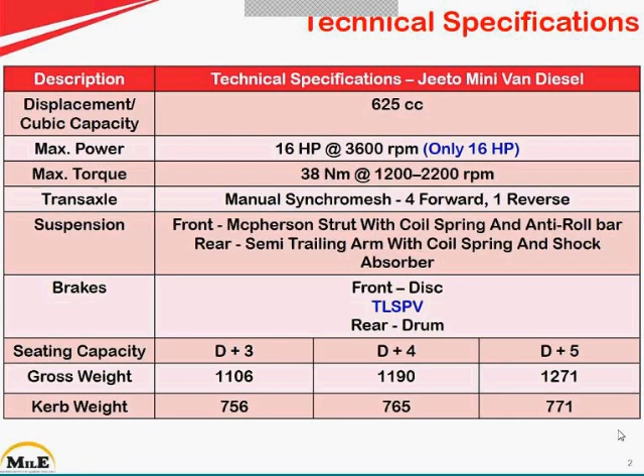Next, let's discuss how the vehicle looks from the inside. Take a quick look, the pictures basically speak for themselves. The instrument panel is nice and wide, and it's basically going to serve the requirements for a vehicle in this particular class.

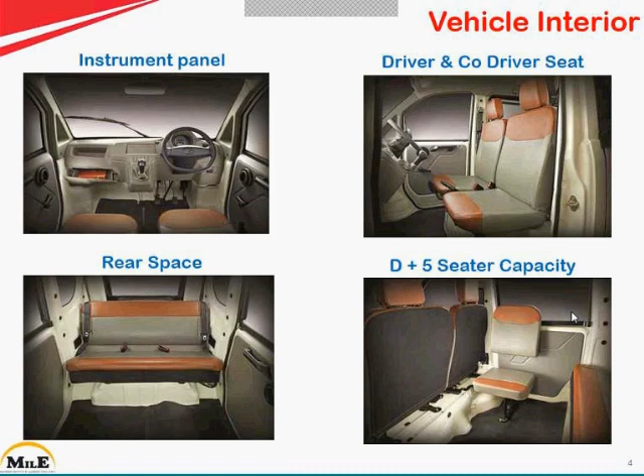So we're discussing seating positions. Before you take 5 people along with you on a test drive, this picture makes it very clear how exactly people would be sitting. When you talk about D+5, that's what basically makes sense, this is how the 5th person is going to sit. The sufficient leg room we have makes the seating posture convenient for this person.

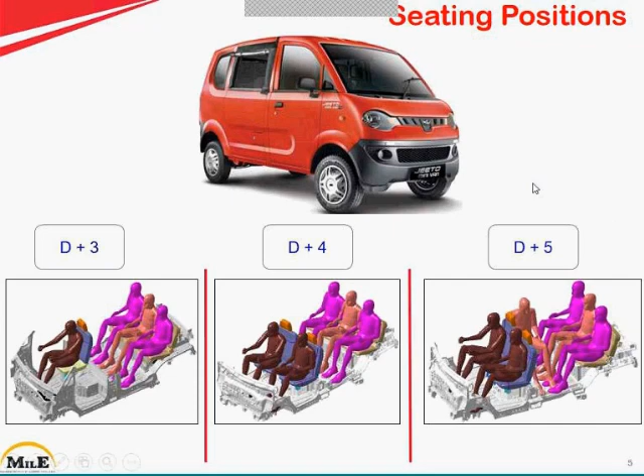So yeah, D+3, D+4, D+5. Let's move ahead, we have more numbers to basically munch and chew.

These are numbers like the front track, rear track, wheelbase, the height of the vehicle, the length of the vehicle, and the width of the vehicle. The front track is 1305 mm, the rear track is 1290 mm, and the wheelbase is 2250 mm. So it's pretty stable when it comes to driving.

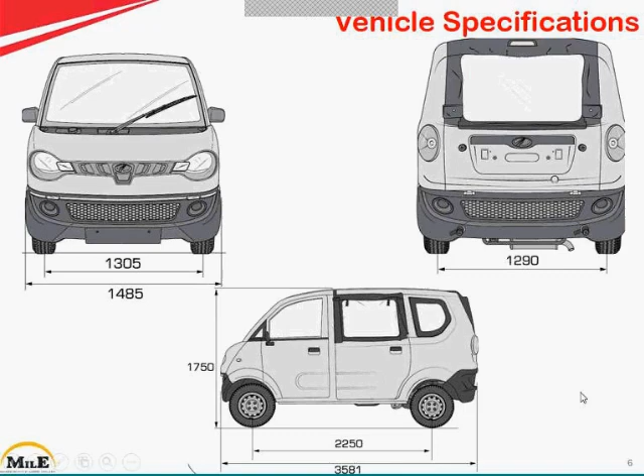Let's move ahead and talk about the engine specifications. First question, which kind of engine does it have? It's got a single cylinder diesel engine, called the mDura single cylinder diesel engine. Displacement is 625 cc's, we spoke about this before. It's got 16 horsepower and 38 Newton meters of torque, and it complies to BS4 emission norms.

These are the quick points you can make a note of, or simply remember if you were to talk about it to somebody.

Then we're talking about the Jeeto Minivan. There were a lot of videos we've been circulating since the previous year, the special tool based videos. In that series there was also a video about the stretch belt removal and installation. There's a tool available for the removal and installation of the stretch belt.

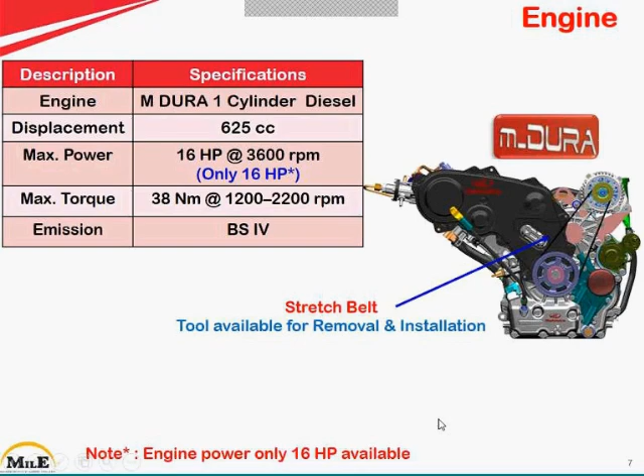Engine power is 16 horsepower, only a 16 horsepower variant option is available. Then after that we're talking about specifications for the Transaxle.

We just spoke about what the engine has, basically the specification of the engine. Then if we're talking about the Transaxle, we spoke about it too, it's got 4 forward gears and 1 reverse gear.

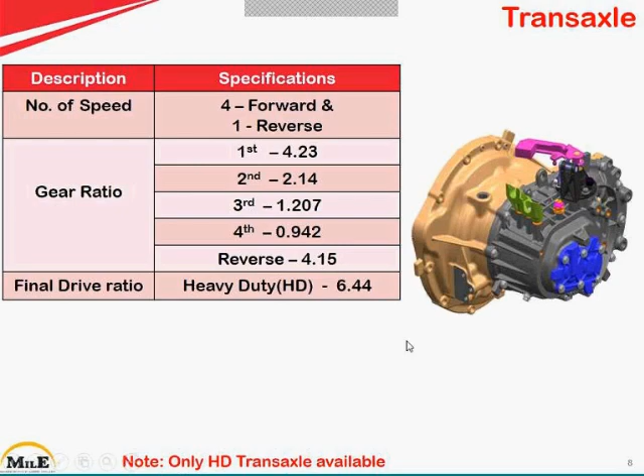Whichever gear you shift into, you have sufficient pulling power, which makes ferrying people quite a breeze. Now, the steering system has the manual steering column with rack and pinion steering. For suspension, it's got independent suspension with MacPherson strut type front suspension.

For the rear, it's got semi-trailing independent rear suspension with gas-filled shocks. So whether people are sitting in the front or at the rear, even if the car hits potholes or a hump on the road, it won't cause much discomfort when driven on uneven terrain. The IFS and IRS ultimately make it quite comfortable in terms of ride quality.

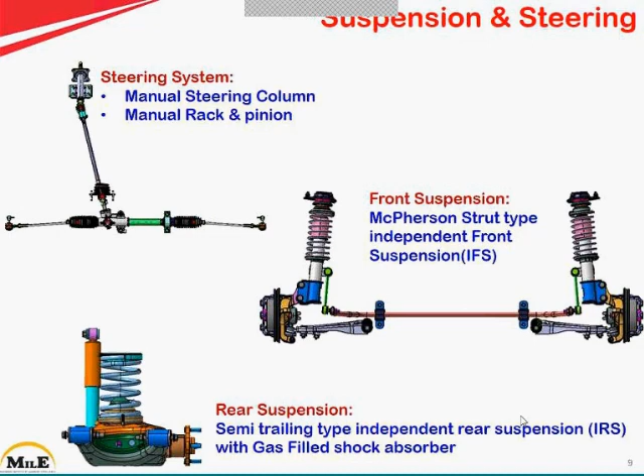Now let's talk about the brake system. It has disc brakes on the front and drum brakes at the rear. We spoke about this earlier, and when we highlighted brakes, I said we'd discuss TLSPV later. So now we'll discuss exactly what TLSPV is all about.

TLSPV stands for twin LSPV. Now people ask, we get the name, but what does LSPV stand for? LSPV means load sensing proportionating valve, though a lot of people call it load sensing pressure valve as well. In Mahindra terms, we use the terminology load sensing proportionating valve.

The thing is, the more load there is on the vehicle, the more pressure there is on the rear brakes. At the time of braking, there is a mass transfer which happens - the load travels towards the front. In that case, LSPV prevents the rear wheels from locking. So twin LSPV senses the rear axle travel and adjusts the brake line pressure to both front and rear wheels.

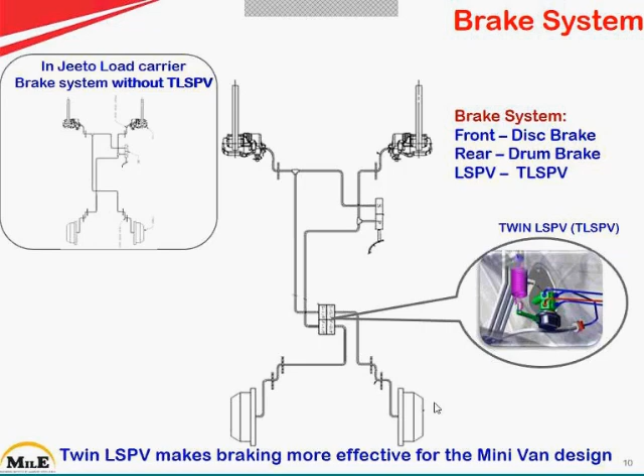Now let's move ahead and talk about the air intake system. In the Jeeto Minivan, the new vehicle we're highlighting, the air intake is through the right hand frame. In the Jeeto load carrier, the air intake was through the left hand frame, so the side has changed now.

You can look at this figure - over here you can see the front snorkel, that's where it is. You can also check out something called the pre-cleaner. Where is the pre-cleaner? You can simply locate it over here in this figure, the one in yellow.

Now what exactly is the role of a pre-cleaner? The pre-cleaner has aerodynamically designed fins at its inlet, which gives the entering air a cyclonic motion. The heavy dust particles get centrifuged in the outer area of the pre-cleaner and get ejected out through the dust evacuator valve, so any dust gets expelled through this valve.

So it is operated by engine vacuum. If there is dust accumulation, the valve opens up and simply expels the dust. So when it comes to the orientation or fitment of the pre-cleaner, you have to make sure that the dust evacuator valve outlet is oriented downward and towards the air cleaner side. So when it comes to removal or inspection, you just got to ensure this particular aspect.

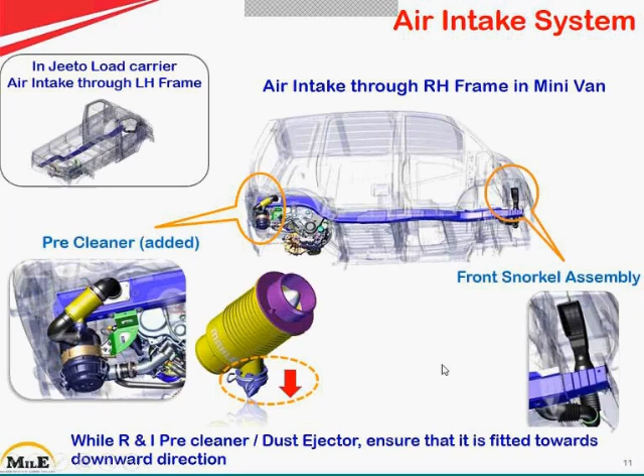So let's move ahead. We just spoke about the pre-cleaner. Now we can talk about the air cleaner change interval.

So for change intervals, there are two options given, depending on your driving conditions - where you're driving the car. If you're driving on paved roads or normal operating conditions, the air cleaner change intervals look something like this: cleaning would get done every 5,000 kilometers and the replacement every 20,000 kilometers. So you have more range over here.

And when it comes to a person driving the car on unpaved roads or dusty operating conditions, the cleaning stays at 5,000 kilometers like in the previous case, but the replacement is every 10,000 kilometers. That means at 10,000 kilometers on the clock, you simply change the air cleaner. So it depends on the customer, in which territory they drive the car.

So obviously nobody would come and say, I want my performance going low, I'll keep changing the air cleaner regularly just because the dealership guys say so. It depends on where the person is driving the car. If you have more dust, obviously you gotta be changing it much more frequently.

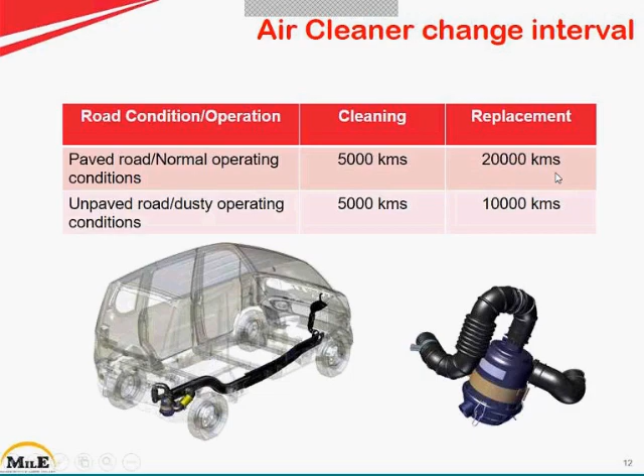Okay, so let's move ahead. Now we can talk about the cooling system. Just some change points which I would be highlighting over here - you can take a quick look in the figure. Firstly, if you ask how things were in the Jeeto load carrier, the earlier vehicle, the radiator and cooling fan are fitted in the middle in front of the engine. So that's the load carrier.

Now this is the passenger vehicle, a minivan. So things are obviously a little modified, which is all about making provision for the comfortable seating position of the people inside the vehicle. So in this case, the radiator, cooling fan and the stone guard are fitted on the rear side behind the engine, since the engine is over here at the rear.

In the load carrier, this vehicle was for ferrying goods and small cargo, so nobody was sitting over here - that requirement was not there. So things were certainly different. Okay, let's be aware of it. Let's move ahead.

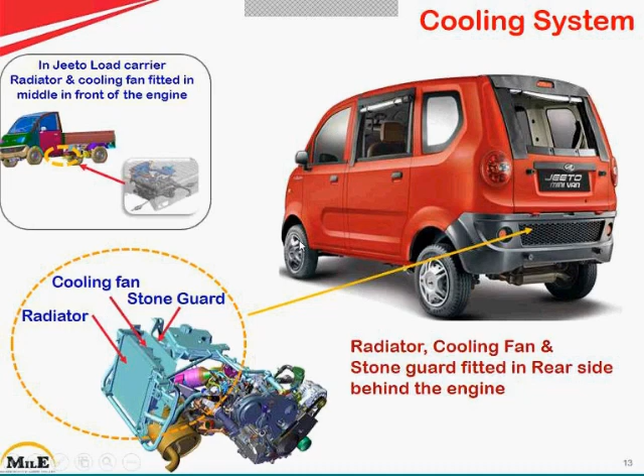Now we can talk about the fuel system bleeding. If you've logged into YouTube, we have this channel called Mahindra DIY, where we have put up videos on how you do the fuel system bleeding, or the airlock removal procedure.

So the fuel filter needs to be bled whenever there is an airlock - that's when you need to bleed the fuel filter, or do the fuel system bleeding. The airlock can happen due to a bunch of reasons. The first reason could be you're running out of fuel, and the second reason could be when you're doing the fuel filter replacement - that is when airlock could happen.

So if you want to remove the airlock, you need to do the bleeding process. Now you can look at this chart as to how and what exactly needs to be done when it comes to the fuel system bleeding.

So the first step is you put the ignition in the on position, then you press and hold the brake pedal, and after that you start pumping the accelerator. That means 3 times you press and release the accelerator pedal, and then the 4th time you got to press and hold it - hold the accelerator pedal.

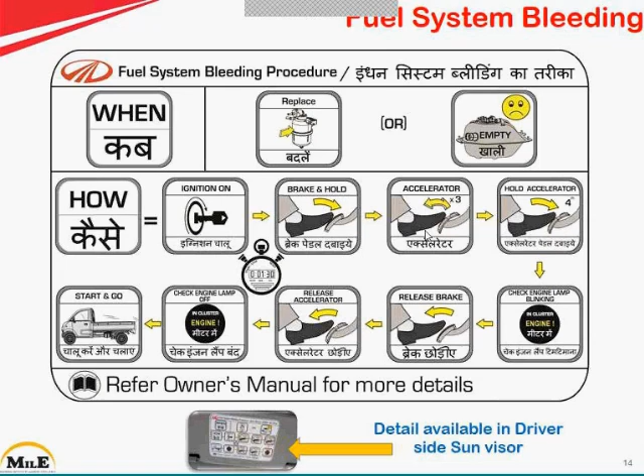To make it simple, on the driver side sun visor, there's a particular sticker made available. Obviously people from Mahindra, the CCMs, or anybody dealing with the product won't need to be bothered for how exactly this sequence is done. As I said, we've already made these videos and put them on YouTube, so if you feel you need to check how things are done, you can go online and check it out. All right, let's move ahead.

Now let's check out how the instrument cluster looks. You sit in the vehicle, put the key in the on position, and see the lamps glowing in the instrument cluster. Why do we need to be aware of these telltale lamps? If a new customer is talking to you, you can brief him on certain points about the vehicle, like where the telltale zone is.

On the right side, this is the low fuel warning telltale with the buzzer, and here you can check the high temperature warning telltale with the buzzer. You have the odometer on the LCD, along with trip A and trip B readings. Then you have the set switch and the mode switch. You can simply spend some time and get acquainted with all this.

You have two bars, one on the left and one on the right. The left bar stands for the coolant temperature gauge, and the other graph you see here is for the fuel gauge, showing the full position and empty position. Obviously it's simple for somebody spending time with the vehicle to get used to these terms and the display in the instrument cluster.

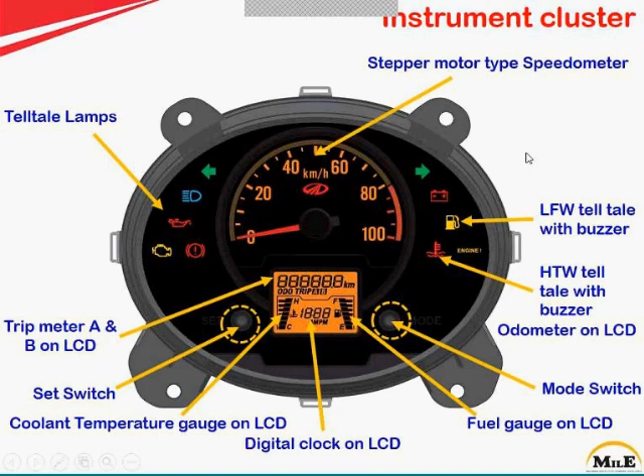Then you have the stepper motor type speedometer, again in the case of the Jeeto Minivan, pretty similar. There's also a digital clock on the LCD.

Let's move ahead and look at the electricals in the vehicle. Where is the battery? It's on the rear left hand side — this yellow highlighted box, or the black cover. You open it up and see the battery. The next thing on the rear is the EMS ECU location, just behind the rear seat on the right hand side. So your EMS ECU and engine fuse box location is on the rear right hand side, as this picture highlights clearly.

Then the passenger compartment fuse box is under the instrument panel, on the co-driver side, just under the glove box. This is how it looks.

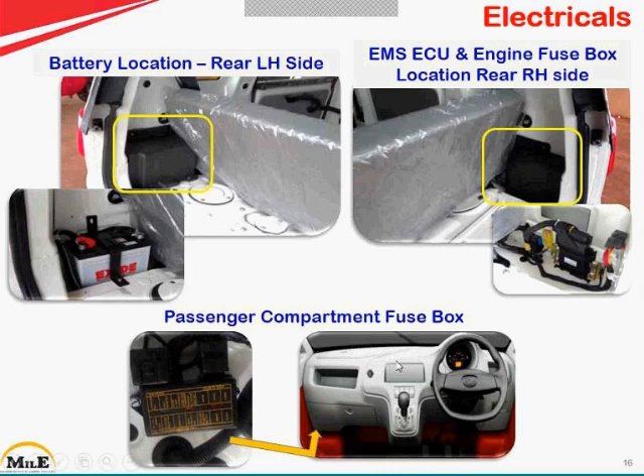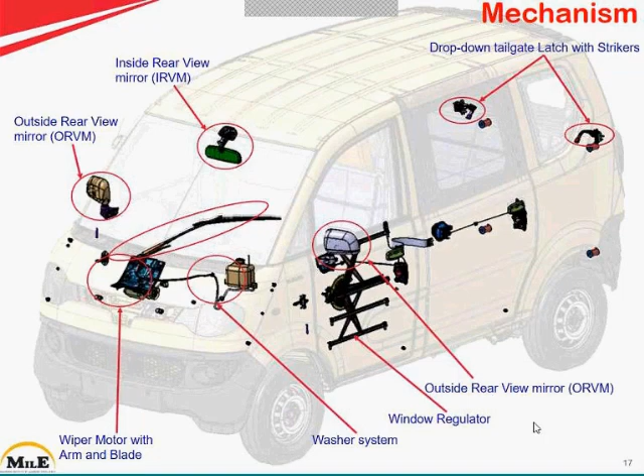How do you access the engine compartment? First, roll down the rear seat and open this panel. You remove the rear seat bolts, roll down the seats, and that gives you access to this panel. Then simply open this tray, and that's your engine compartment.

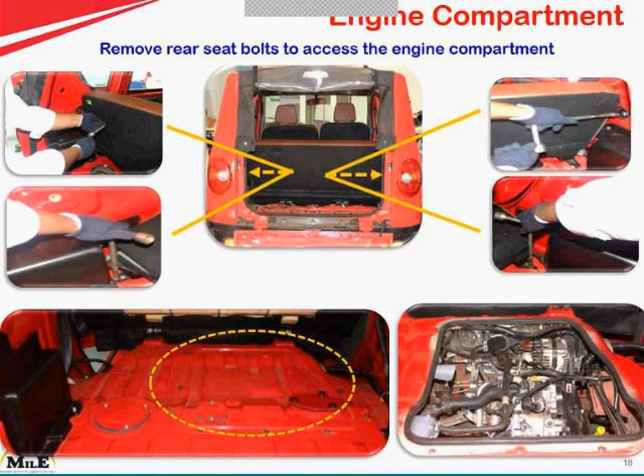Technicians who work on this vehicle are familiar with the load carrier too, so they know how to access the engine compartment. In this vehicle, they have to do it from the rear, which is a little different since in this minivan the engine is at the rear, not in the central portion of the vehicle.

Now let's check out basic stuff like where the warning triangle is, where the jack is located, and where the tools are. The warning triangle is behind the driver's seat. The jack and tool location is below the co-driver's seat. That's how the tool kit looks.

You have a long screwdriver to remove the headlamp, and a modified wheel spanner to remove and refit the rear seat bolts. The wheel spanner end is kind of modified.

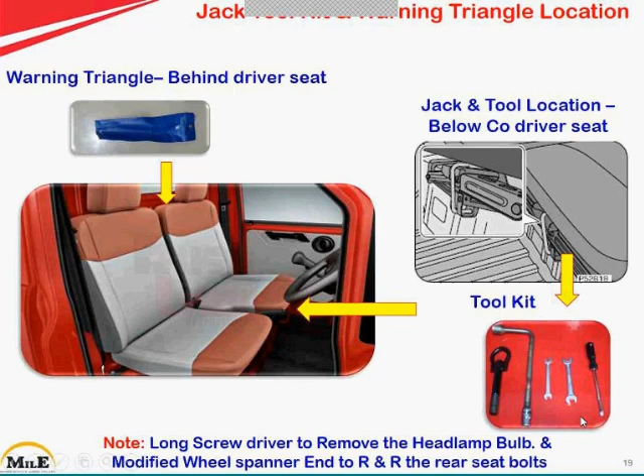We'll just speak about what is very specific for this presentation. That's it. Next comes the spare wheel. If I were to say remove the spare wheel, how do I do that?

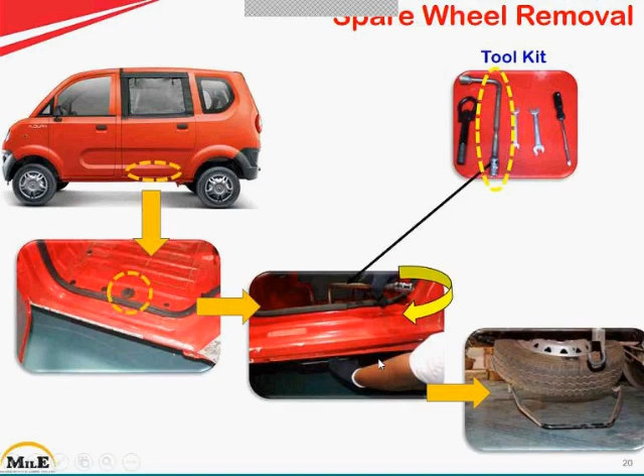This is the access point to start opening the spare wheel. Open the rear door, there's a rubber cap, you open this, and then take your spanner to get access to the wheel nut. Then you start opening it, and from the bottom the spare wheel starts dropping down. In this picture he's operating the wheel spanner with one hand and holding the dropping wheel with his other hand.

Then jacking points - every car we talk about, we always emphasize their importance. Whenever you go to a dealership, technicians are trained, but it's not always the same technician there for a long time. People keep changing roles, so there could be a new person on the job, and you have to keep ensuring they follow standard procedures.

These jacking points are reinforced areas under which you place the head of the jack before lifting the vehicle. If you put the jack anywhere else and start raising it, that's simply going to damage the vehicle's underbody. So you must ensure that anybody raising the vehicle in the dealership, for any job, puts the head of the jack just below the jacking points before raising it.

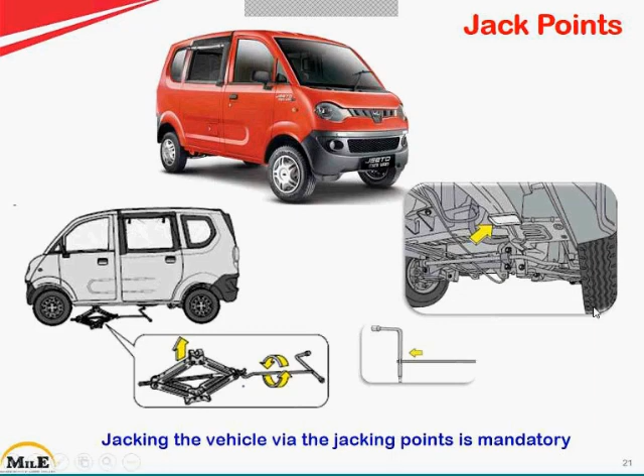Then comes the question of how do you tow the vehicle. You have the tow hook, which you attach on the front portion of this vehicle, towards the bottom - that's the tow hook location. In case of a breakdown, this is how you connect your tow hook and go about towing.

In the toolkit, you have the tow hook available. This is the tow hook highlighted here.

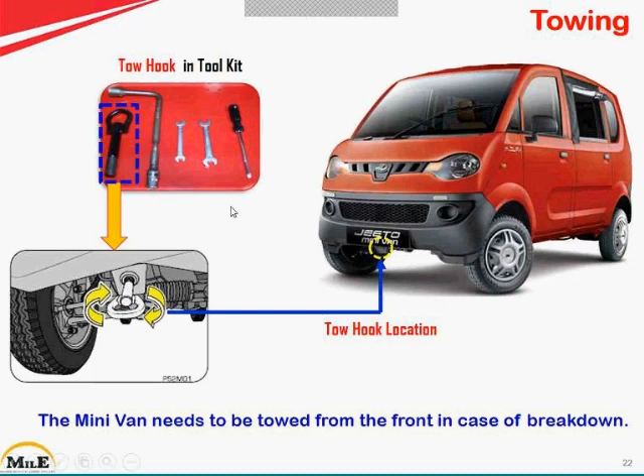Let's move ahead. Now we can check out the maintenance fluids - which fluid you use for the engine and which oil for the transmission, along with the changing intervals. The engine oil used for the Jeeto Minivan is Maximile Premium Eco, the new engine oil. The quantity is 2 liters, and the replacement interval is first change at 5,000 kilometers, then 10,000 kilometers, and afterwards every subsequent 10,000 kilometers.

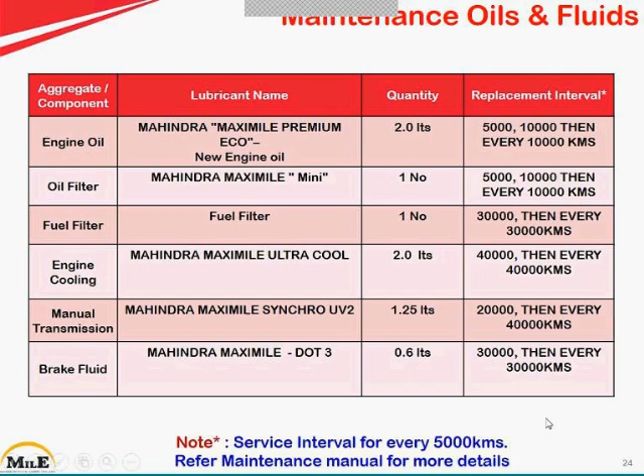The purpose of this vehicle is ferrying people, so to ensure there is no abuse happening, it's better if the person follows the procedure laid down by the manufacturer - every 5,000 kilometers you've got to get your vehicle serviced. For more information you can go through the maintenance manual. These manuals are released now, so you can check them out on TechNet Mahindra.

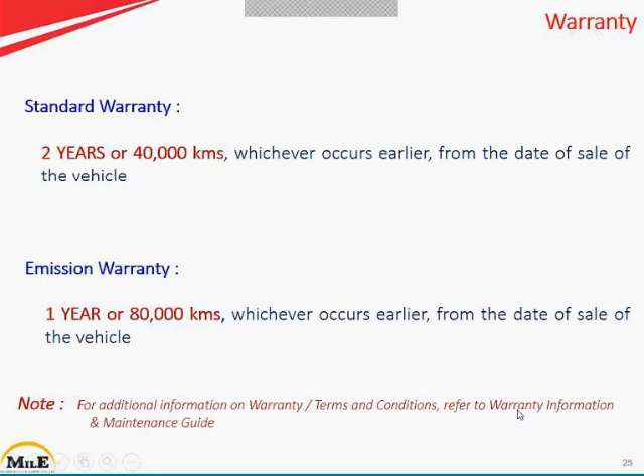So how much is the warranty? The standard warranty is 2 years or 40,000 kilometers. The emission warranty is 1 year or 80,000 kilometers, whichever occurs earlier, from the date of sale of the vehicle. For any other warranty related information, you can go through the warranty information guide and the maintenance guide.